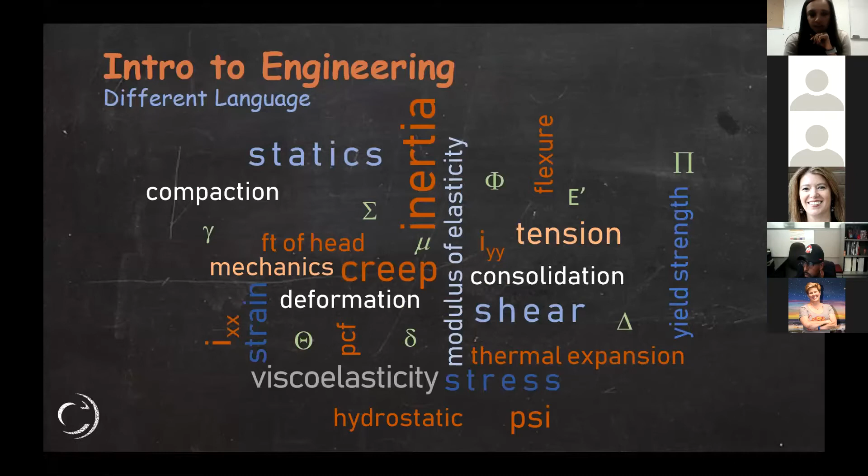All right, I believe we left off where he was talking about the Greek letters, is that correct? So we're on structures. Okay, all right, let's start with a look at the structural side.

The most basic form of structural design takes into account the behavior of rigid bodies. I say rigid bodies because as engineers and contractors, we typically deal with rigid bodies rather than flimsy or floppy bodies. If we can't estimate how a still body or a body in motion will move, then we can struggle to design a safe structure. Indeed, the less rigid a body is, the more difficult a design becomes.

When engineers begin their college coursework, ooh, Tryg, I see is entering the room. One of the first classes is a study of statics. Let's see, Beth, do we have Tryg back in? Hey, I'm back. Hey there. Well, sorry Tryg, Alexis already gave your whole presentation, so we're all now ready to go be engineers. But thank you for trying.

I'm really sorry about that, I haven't lost my internet connection in a year and it suddenly decided to go out just now. Well, we are thrilled that you're back, so we'll let you pick up right where you left off. Okay, where did I? Honestly, I was still going, I didn't know I lost you guys. I gave a brilliant presentation.

The last 10 slides, I think if you pull up the structures theme slide and go from there, that would be great. Okay, so behavior of rigid bodies. Yes.

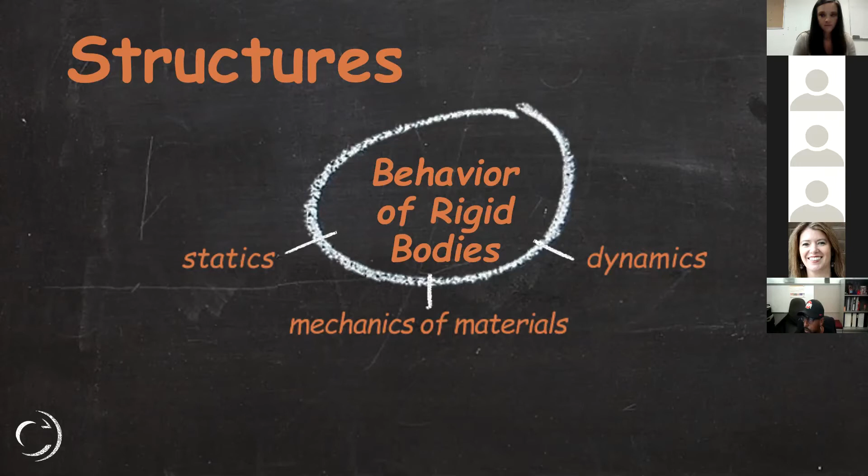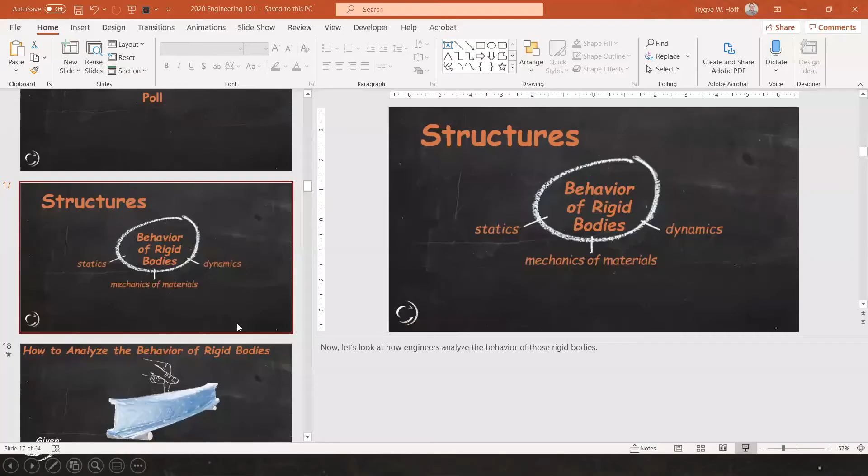And looks like PowerPoint thinks that I am in the wrong spot. There we go.

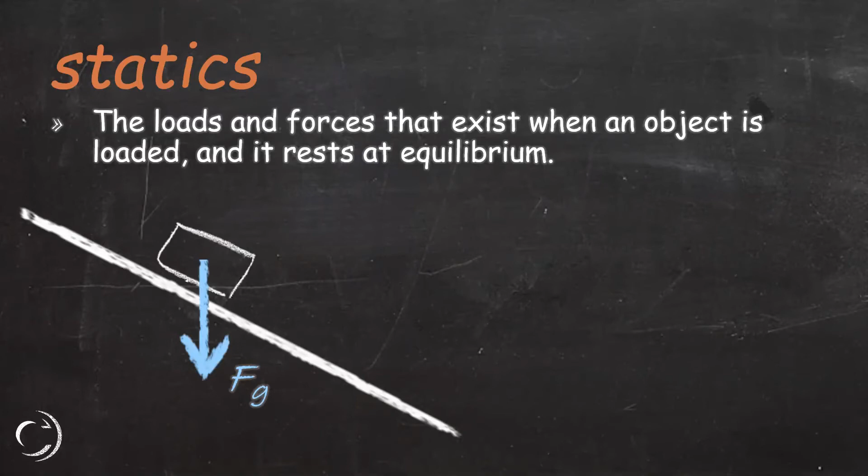Okay, so let's take a look at each of these. First, statics. Statics is the study of the loads and forces that exist when an object is loaded and at equilibrium, meaning it's not moving. So if we take a ramp and place a block of wood on it, we know it's going to experience gravity. The force of gravity is pulling it straight down, trying to pull that block of wood to the center of the earth. Now, Isaac Newton tells us there need to be equal and opposite reactions.

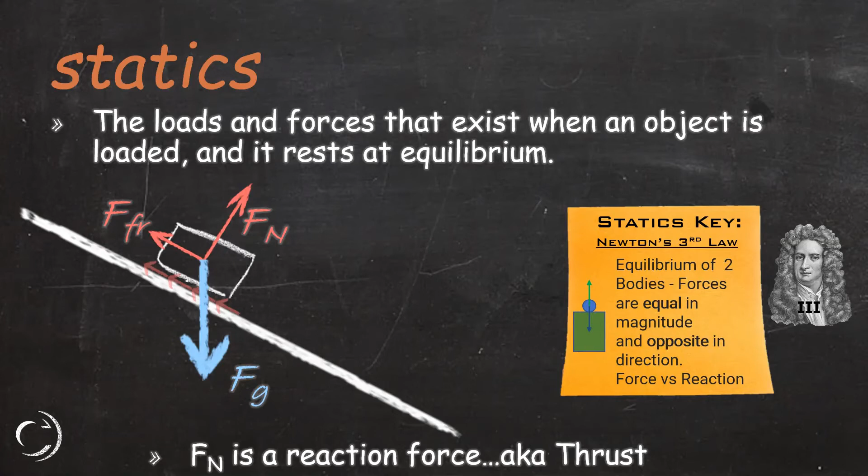So in other words, if the force of gravity is the only thing acting on that block of wood, the block would try to fall through the ramp. Obviously, something is keeping that from happening, and that's two different forces. One is the force of friction, which keeps the block from sliding down, since in statics we're looking at it not moving. And the normal force, which is just another way of saying the perpendicular force — that's what the ramp is doing to our block of wood. F sub n stands for the normal force, and that's a reaction force, reacting to gravity. That reaction force is just another way of saying thrust. So a lot of times you'll hear the term thrust thrown around — thrust is the reaction to a different force.

Now let's look at dynamics. Dynamics is when we add just enough load that the body starts to move. So we take our same block of wood on that same ramp. It's still experiencing gravity, still experiencing the pushback from the ramp, and still experiencing the friction that's keeping it from sliding. But now we add a new force — let's say we tap it with our finger and the block starts to slide. So the force from our push was just enough more than the force of friction to get the body to move. That's a study of the dynamics of that block.

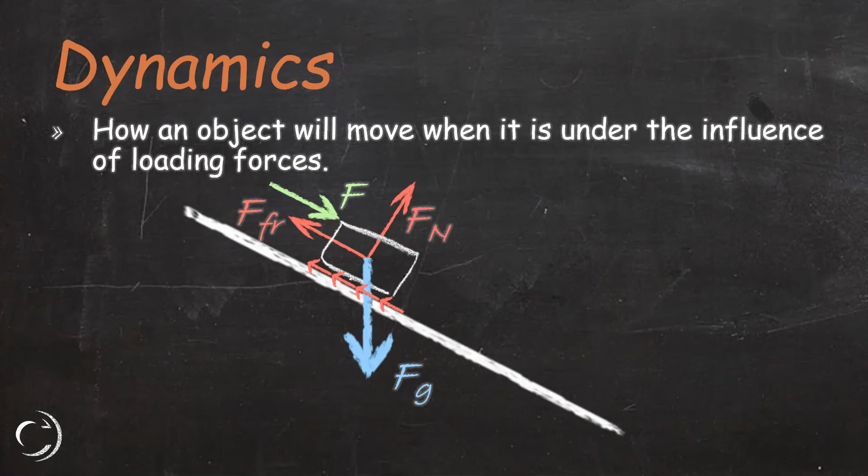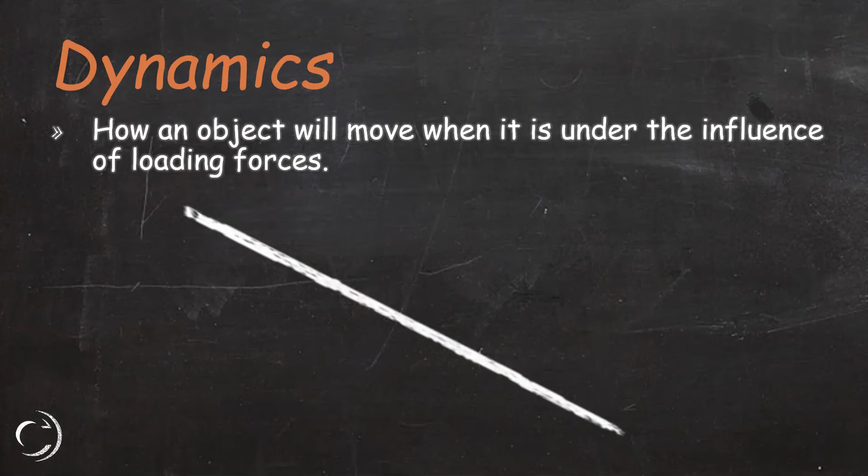Now, what would happen if that force of friction was really strong? Let's say it's on sandpaper on the ramp, and we apply enough force to move it. What's it going to want to do? Well, it may want to slide — there's a possibility, even with 60 grit or 40 grit sandpaper, it might still slide along the ramp. But it may not — it may grip so much that when we apply that force, the block starts to rotate and then rolls off the ramp. That's another aspect of dynamics we can study when looking at these different rigid bodies.

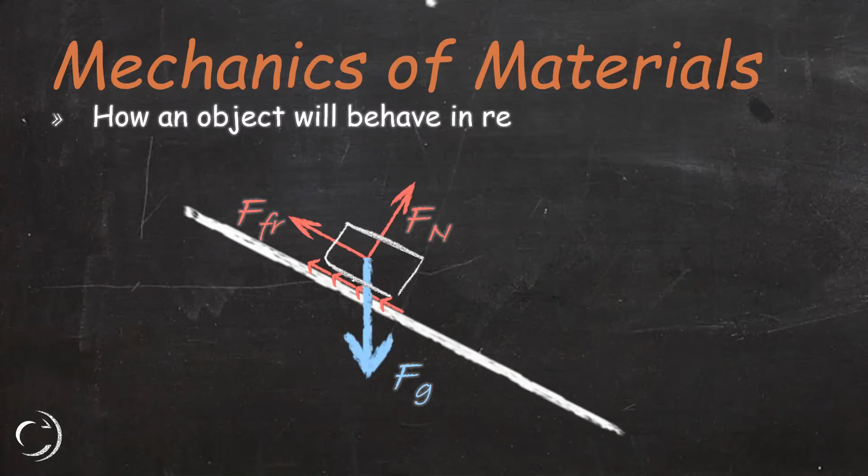So now let's jump to the next category, mechanics of materials. Mechanics of materials is a study of what happens, what that block of wood does, when we apply the load and it doesn't necessarily move. Well, the strength of the material might impact what happens to the block — maybe the block collapses if we have too much load on it.

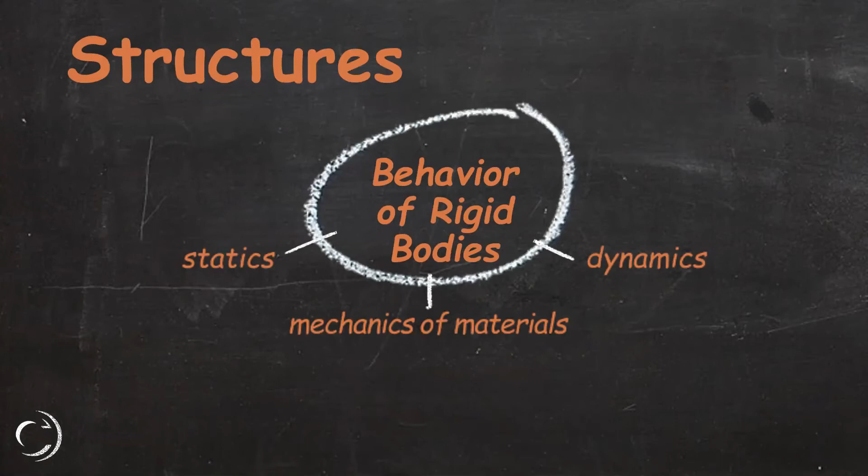So that's the behavior of rigid bodies. We're looking at statics, we're looking at dynamics, and we're looking at mechanics of the material, or the strength of material. Now, how do we analyze that behavior of rigid bodies?

So one of the givens is that all objects are going to deform under load. Now, when I press down on my desk, it doesn't visibly deform. But microscopically, if we're dialed in super close, there is a little bit of deformation there, and we could measure that. The mechanics of materials tells us how to determine how much it's going to deform.

So the material of this wooden desk is pretty strong, and you're not going to really see it deflect much. But if I were to push on some Jell-O, you would see it deflect quite a bit. So the difference in the strength of that material and the stiffness of that material all plays into how those objects deform under load.

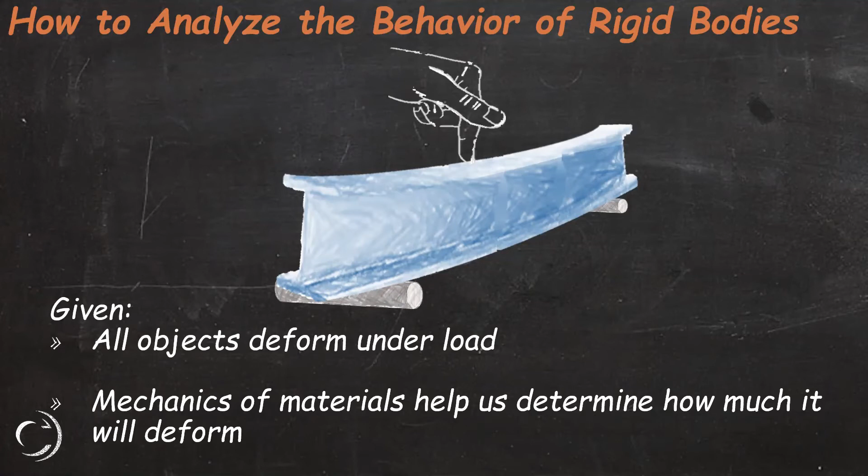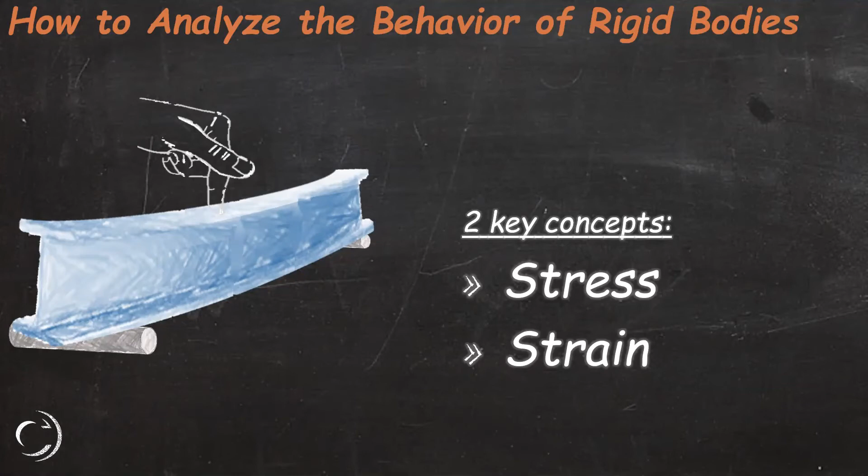So there are two key concepts here when we're looking at how rigid bodies behave, and those two concepts are stress and strain. You guys have all heard of stress and strain, both personally, certainly in the last 6 months, but also you've heard about it from a structural standpoint. I'm going to go out on a limb here and say that you have. So let's take a closer look at both of these.

Stress is the measure of the intensity of an internal load acting on the object. Sometimes it's difficult to remember which one of these is which. Remember, stress is what you feel day to day when you're at work and you are stressed, and it's just tearing you up inside. You're not showing any physical reaction to that stress outwardly. It's all internal. With strain, it's the other opposite end of the spectrum.

With strain, you're actually deforming. So when your arm breaks, you didn't stress your arm, you strained your arm. Now, certainly stress and strain work together, and we'll talk about how they work together. But the very basic concepts of stress and strain: stress is internal, we can't measure it but we can calculate it. Strain is external deformation, so we actually see that change.

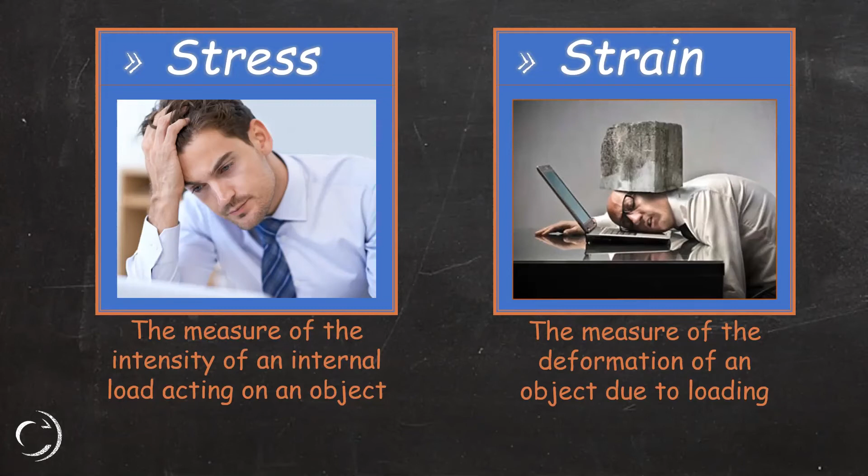So let's look at some different stresses. We're going to look at three basic categories of stresses: axial stress, bending stress, and shear stress. So let's look at axial stress real quick.

Axial stress means the forces that arise from internal loads that act along the longitudinal axis of a member. We're showing two different types of axial stress in this slide. One is tensile stress, so in tension. That rope that we're showing at the top is in tension, so that's pulling it along the longitudinal axis, lengthwise. The other is compressive stress, and we're showing that with the elephant sitting on the column at the bottom of the slide.

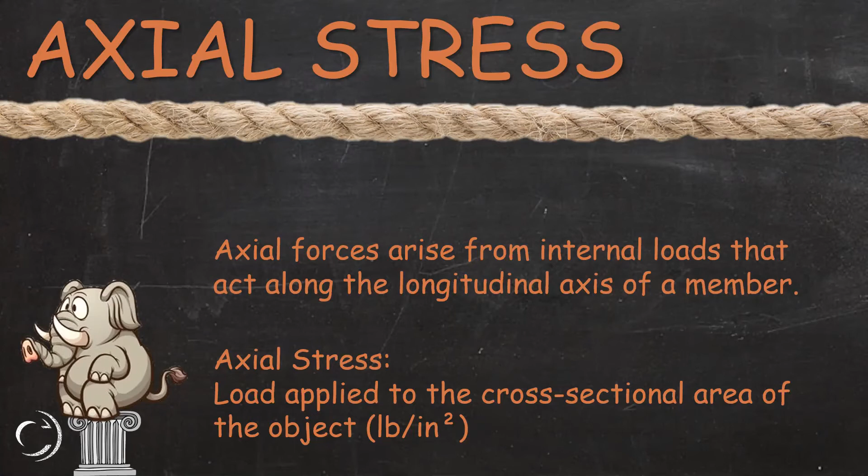Now, we calculate axial stress by taking the load that's being applied, so in this case, an elephant. How much does the elephant weigh, and what's the cross-sectional area of that column? If we were to slice that column horizontally, we could measure what its cross-sectional area is, and then we would take the weight of the elephant divided by that cross-sectional area, and that gives us the axial stress in that column. Here's the equation for that.

Let's take an example, just a really easy example, some very simple math. If we had a 1 inch by 1 inch concrete bar, it doesn't really matter how long it is, but let's say it's 1 inch tall, 1 inch wide, and 10 inches long. The cross-sectional area, if we slice that bar down the middle, is going to be 1 inch times 1 inch, which is 1 square inch. So the area of this bar is 1 square inch. If this bar was 10 inches long or 100 inches long, that doesn't matter. We're just looking at the axial stress on this bar, which is the cross-sectional area. It doesn't take into account the length.

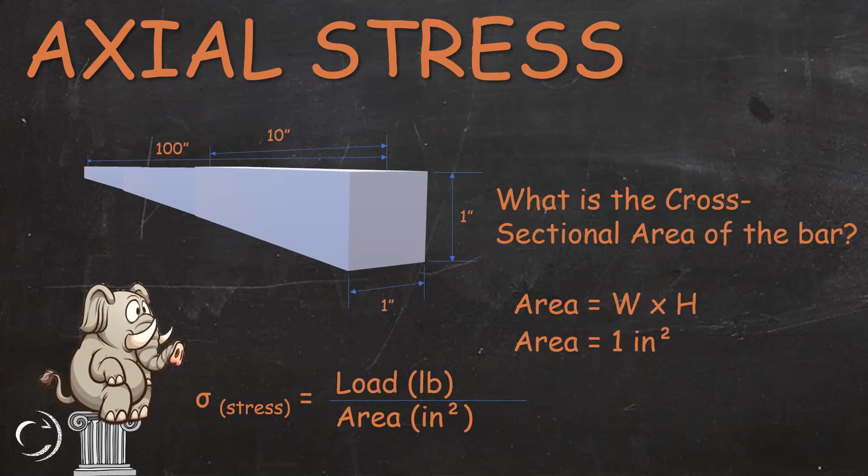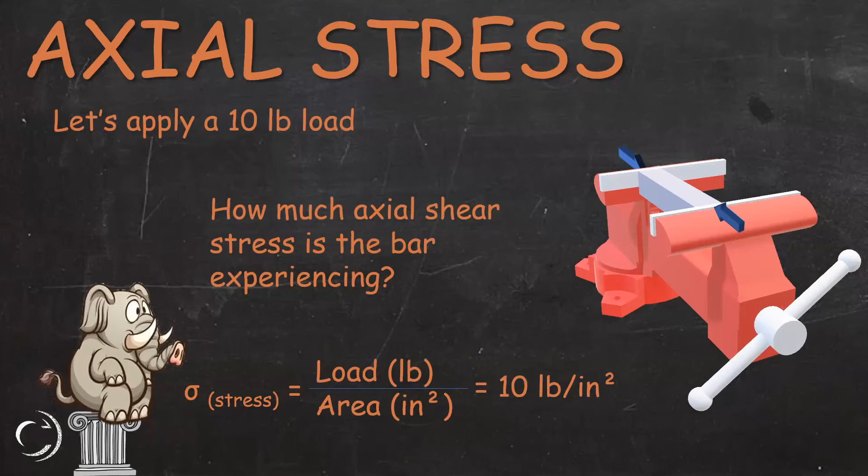So if we took that concrete bar, we put it in a vise and we spin the dial, and we apply a 10-pound load, how much axial stress is the bar experiencing? The load is 10 pounds. We know the cross-sectional area we just calculated is 1 square inch. So it's 10 pounds per square inch, that's our PSI, pounds per square inch. You can denote that PSI or pounds per square inch, both are kind of interchangeable terms.

So we mentioned the differences between tension and compression. Tension is where that rope is holding a load. Compression is where we have a column that's supporting a load. Now let's look at bending stress.

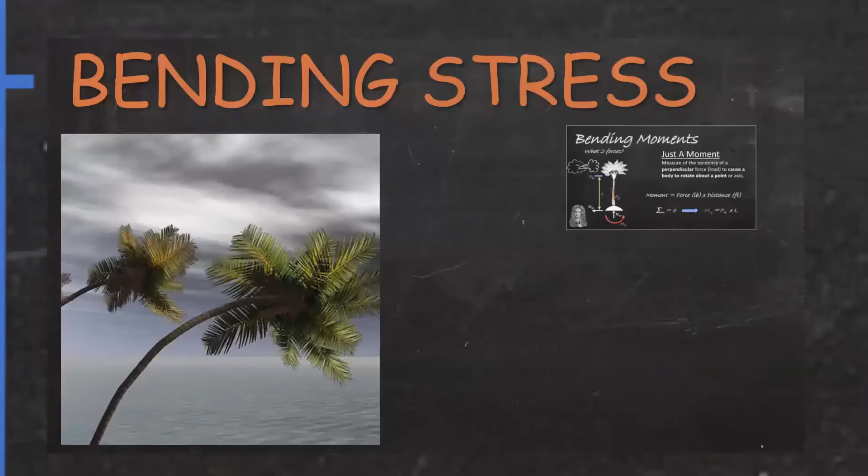Bending stress is an interesting one that's a little bit different. Bending, also known as flexure stresses, develop in an object when there's internal bending moments, and they're caused by a perpendicular load to a longitudinal axis. So looking at those palm trees, let's assume that they're bent over because of a windstorm, rather than that's just the way they're growing. Let's look at what the bending moments, those internal bending moments, are.

A bending moment is the measure of perpendicular force causing a body to rotate about a point or an axis. In this case, with our palm tree, we're applying a wind load at the top of the tree. What are the two forces acting on this tree? We already talked about it with the block of wood earlier. Obviously, we've got the wind load, but we also have the force of gravity pulling that tree down, trying to pull that tree right through the ground. But Isaac Newton tells us no, something has to keep that tree in place where we can see it. So that is the resultant force pushing back up from the beach.

But the tree's not sliding across the screen, is it? So something must be holding it in place, so there's a resultant force pushing back in the opposite direction. If you look at the force of the wind, pressure of the wind PW, and the resultant of the wind down at the root ball, they're pushing in opposite directions.

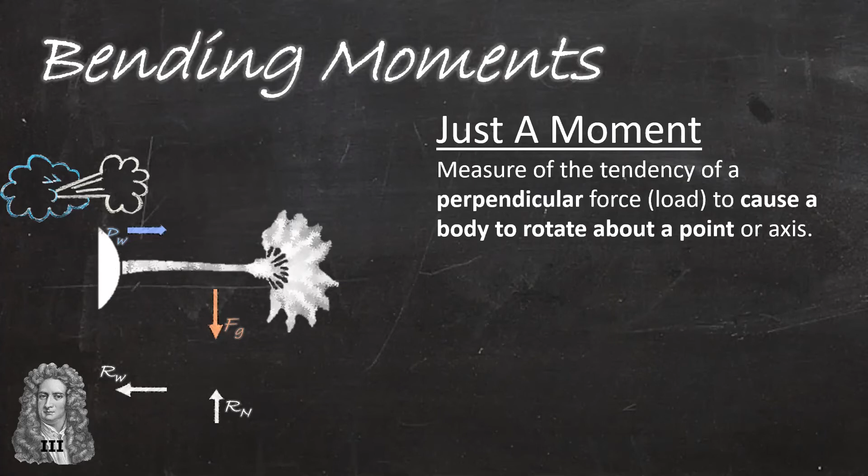If you think about it, that tree is really wanting to twist because it's got something pushing it to the right at the top and something else pushing it to the left at the bottom. It wants to twist. Something keeps it from twisting, and that is the moment created by the root ball of this specific tree.

So the moment at the ground, M sub G, is what we would call that. Moment is a measurement of force times distance. So in this case, there's a moment at the base of that tree that's resisting the wind pressure. That's our force, PW, times the height of the tree as our distance, so let's call that L.

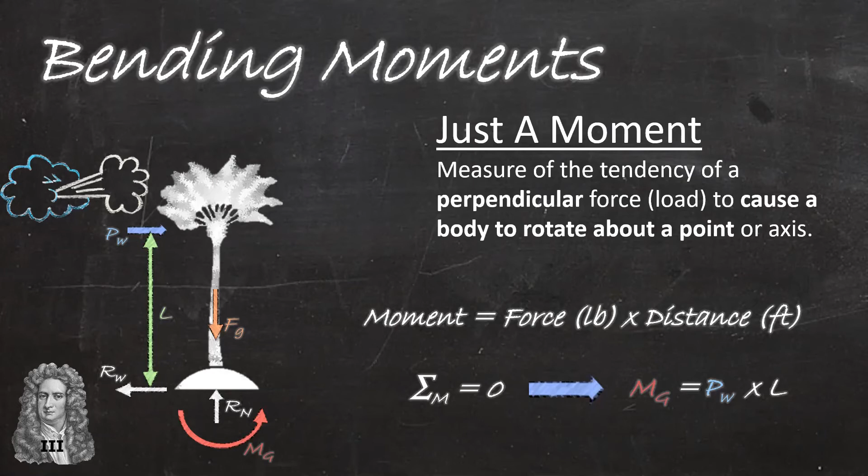We do what we call a sum of moments. Isaac tells us everything has to be equal and opposite, so the sum of all these different forces has to equal zero. We can calculate that moment in the root ball by summing everything to zero and then doing the calculation. We're not going to get into those calculations right now, but that gives you an idea of what these bending moments are.

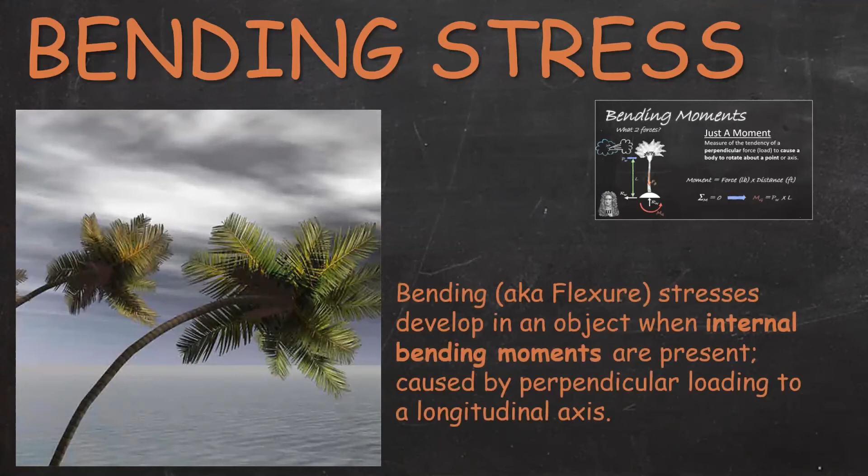So let's look at the bending involved in a concrete beam. The equation for bending is the moment at the bending axis, and we'll talk about the bending axis in a second, multiplied times the perpendicular distance. Remember, the perpendicular distance on that palm tree was the height of the palm tree. And then we divide by the moment of inertia.

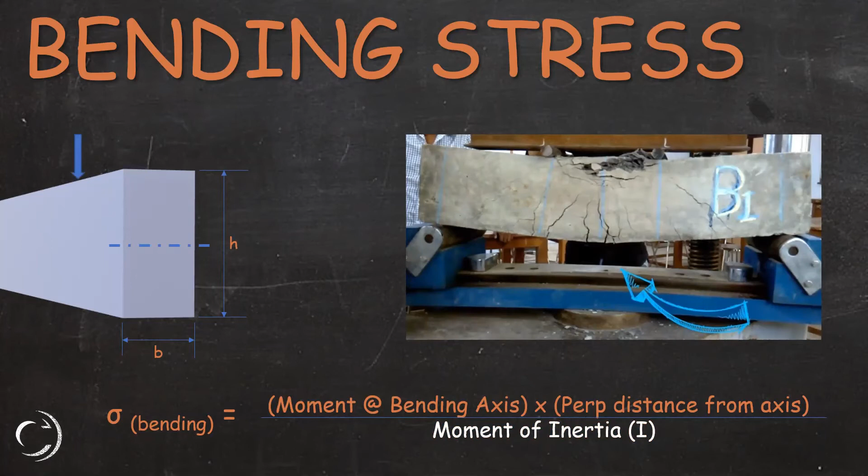So this is our bending axis. We apply a load from above, and that beam is trying to bend around that dotted line. Let's talk about the moment of inertia that's in the bottom of the equation. The moment of inertia is just a measurement of how well a body resists bending and deflection.

Take, for example, if you were to break your arm, the strain that it experiences. If you're applying a load to your upper arm and it wants to break, the resistance to bending that the bones are creating is the moment of inertia of your arm. Now, if we're just looking at a rectangular beam, that's a pretty straightforward calculation: it's 1/12 times the width of the beam times the height of the beam cubed.

If you're looking at this equation, you'll notice there's one b in the equation, but there are three h's—that's what we mean by cubed, so there's h times h times h. If that load is being applied from above, the height of the beam is way more important than the width, because I stands for the resistance to bending. The more h's we have, so if it's a tall beam, the more it can resist the bending. So if you were to flip that beam on its side, it would not be as strong because now its height is much shorter.

So think about your floor joists in your house. You'll notice, if you've ever watched construction of your house, floor joists are oriented this way with a lot of height, not very much width.

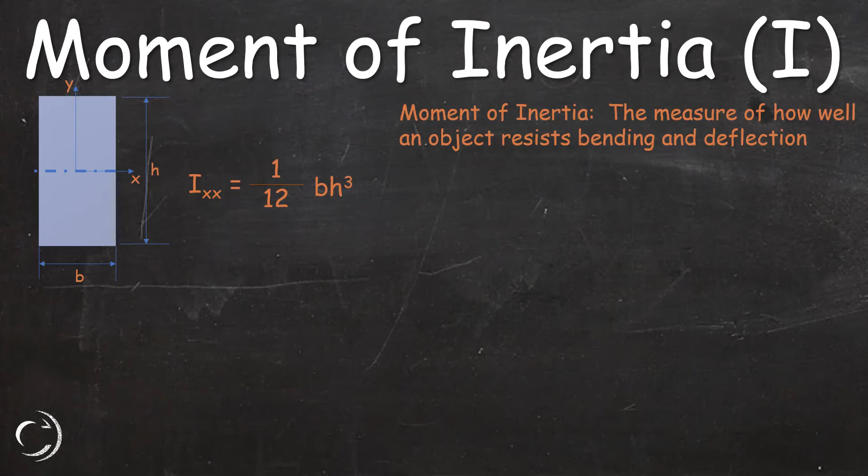Now, if we were to get into a more complicated shape, like a triangle, you can see that the moment of inertia gets crazy. I'm not even going to get into that, but those are the calculations for the bending of a triangle. And then, as I mentioned, I'm in the pipe industry.

So when you're looking at a corrugated pipe, corrugated plastic pipe actually gets its strength from the corrugations. Those corrugations are trying to resist bending, and to calculate that, you have to know what the moment of inertia of that corrugation is. If you look really closely at one of those corrugations—let's see if I can highlight it here with my mouse—calculating that is going to be really complicated if you think about how difficult it was just to do a triangle.

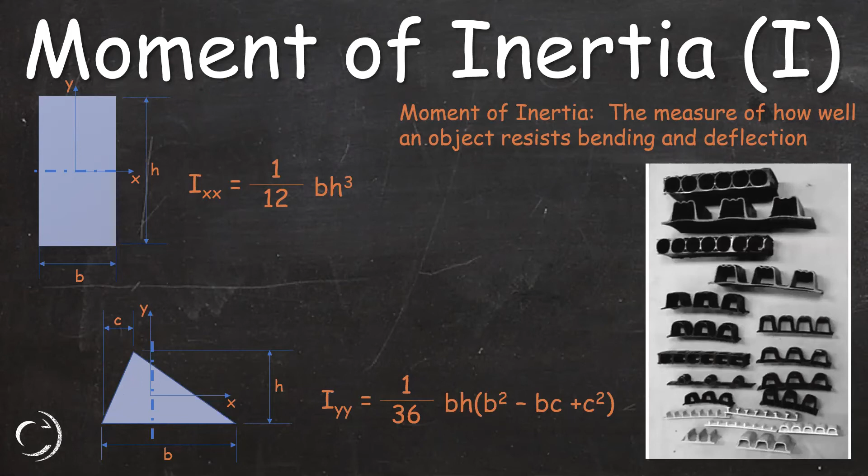So there's a lot of math that goes into this. Typically, your pipe producer is going to give you that information rather than requiring an engineer to calculate it.

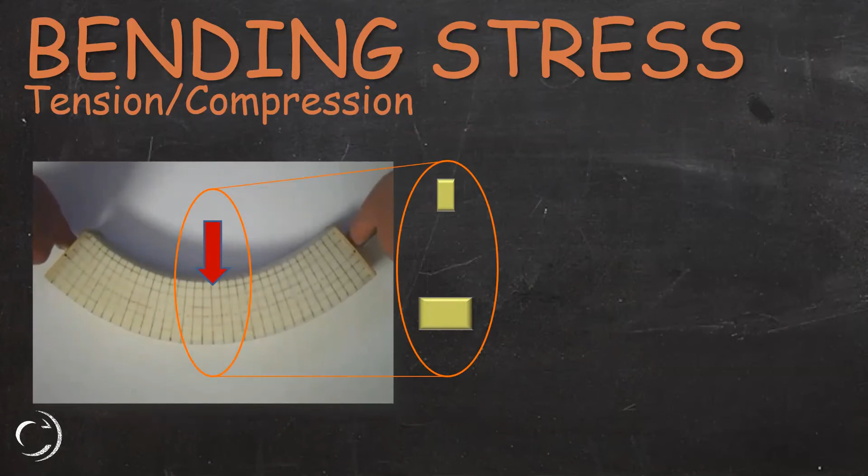Now, bending also has tension and compression, just like the axial loading did. So if we take this beam and apply a load from above, and the beam starts to bend, part of the beam is going to go into compression and part of the beam is going to go into tension. You can see on our little blocks to the right that the blocks on the top are getting squished together and the blocks on the bottom are getting pulled apart, and that's compression forces and tension forces.

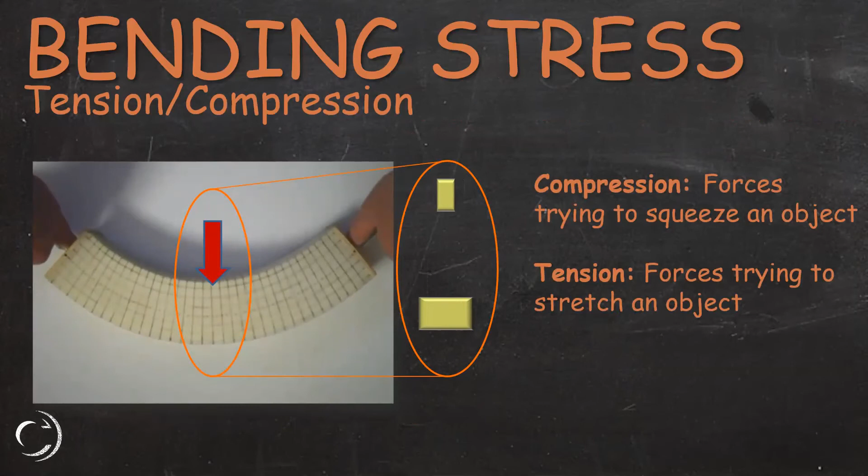So compression, we're trying to squeeze those particles together. Tension, we're trying to pull or stretch them apart.

Take it back to that concrete beam concept. If we have a concrete beam and apply a load right in the middle, just like we did with that foam beam on the previous slide, where would you expect the compression and tension zones to be? You push down on that beam and picture it in your head. That beam wants to bend down in the middle, which means the particles at the bottom are trying to stretch out, while particles at the top near the load are trying to push together. So our compression zone is at the top where they're pushing together, and our tension zone is at the bottom where they're trying to pull apart.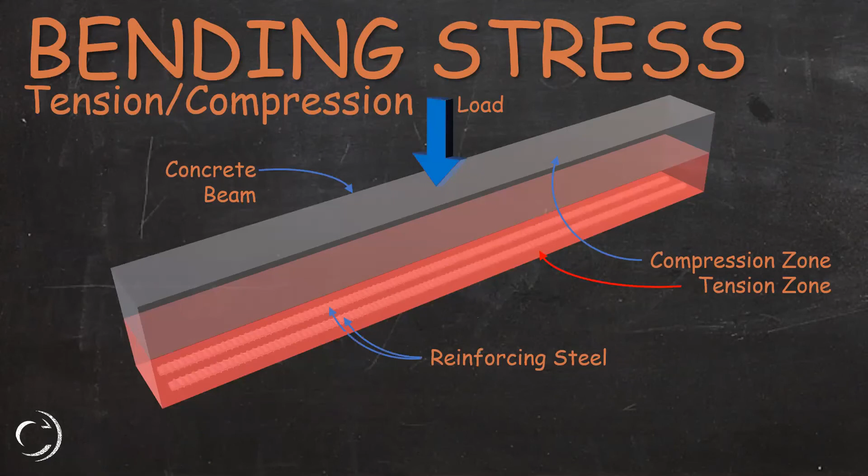Where would we want to put reinforcing steel? One thing we haven't talked about yet is the strength of materials for concrete. Concrete is really strong in compression, but it's not nearly as strong in tension. So we help it out by adding reinforcing steel to the tension zone, which is red in this example. That's where our reinforcing steel should go.

If we were to look at that beam with a finite element analysis, basically a fancy way of saying we model it with a computer, you'd see your compression zone in blue and your tension zone in red. You can see a couple sticks of reinforcing steel inside that beam. As the load is applied, the concrete experiences some stress and then some strain. The dotted line is the stress in that concrete, and then it drops off. You can see when it gets to 2 seconds.

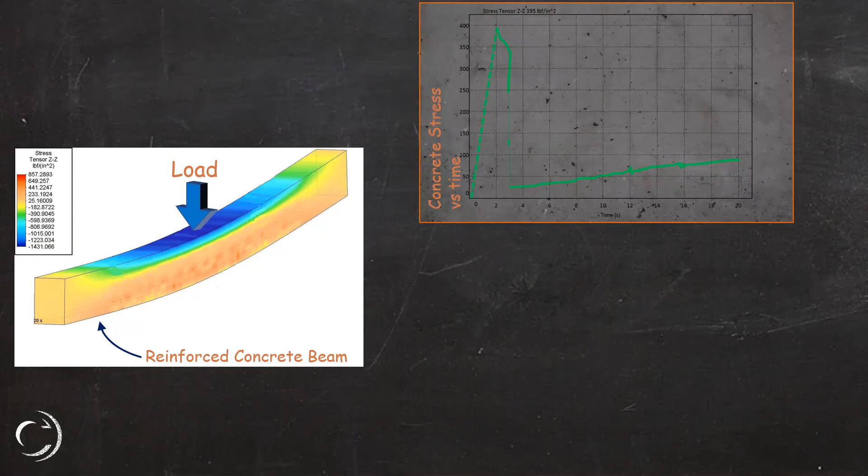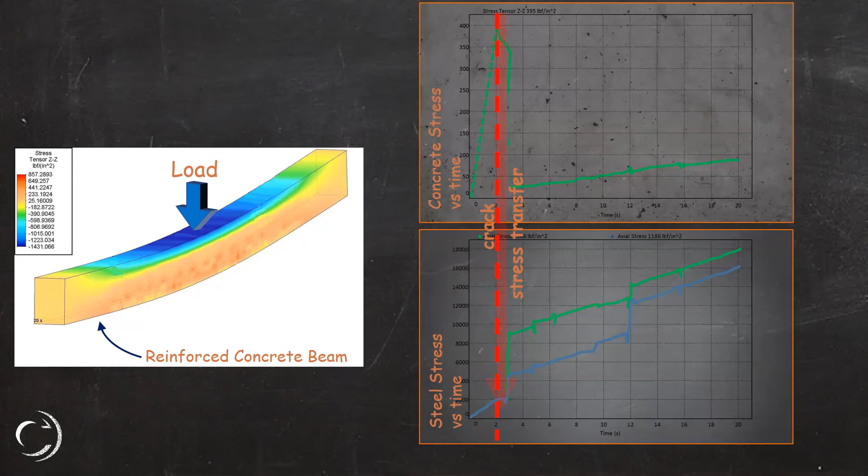Now let's look at what happens to that reinforcing steel. At the exact same spot, at 2 seconds, the reinforcing steel is just kind of going up, and then suddenly it's engaged. What's happening is the concrete is cracking, and if there's a crack, it means the concrete is moving, so the steel has to be picking up load. That's why we see that steel jump up on the chart. So the crack is simply a stress transfer—it transfers the stress to the steel, and then the steel engages and carries the load.

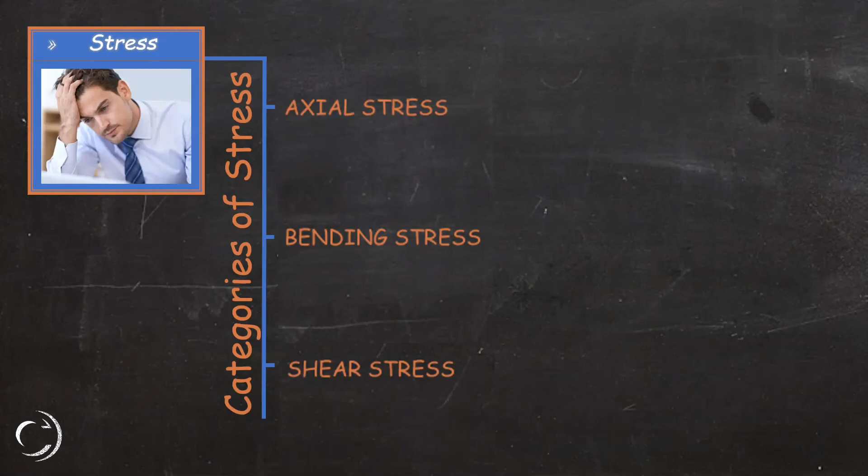That was a little deeper than we needed to get on bending, but I like to point that out. So let's talk about shear very briefly. We're all familiar with the concept of shear but maybe don't realize it. Shear is really the concept of scissors. Even in grade school, we understood that we could take a set of scissors, squeeze the handle, put the blades to a piece of paper, and it would cut it. That is technically shearing the piece of paper.

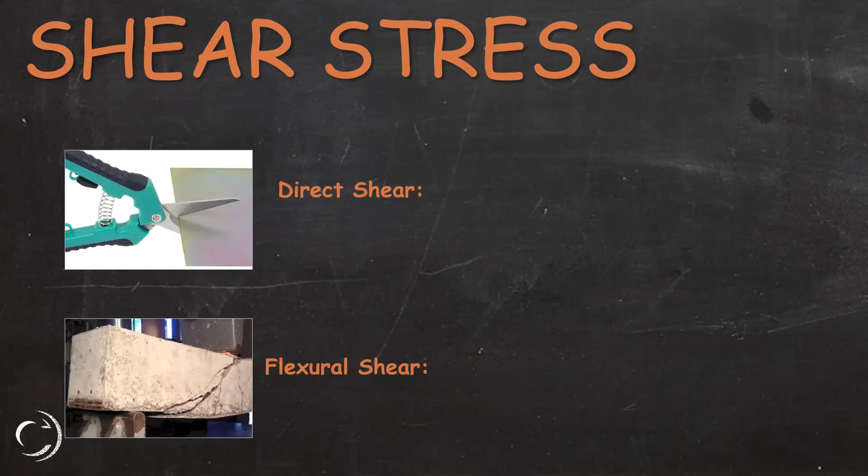That's known as direct shear, where we have a load almost directly opposite on either side. Flexural shear is when we have that load applied over a larger distance. Let's look at each of those. With direct shear, let's put our concrete beam here and apply direct shear, just like scissors. I've spread the point loads out a little bit, but just imagine they're right next to each other in terms of closeness.

Now, as they're pressing up and pressing down, if we took an imaginary cube out of that concrete beam, we could call that unit shear stress. Notice how we have the blue arrow pointing up and the red arrow pointing down—that cube, that unit shear, is trying to rotate. But remember, Newton told us there has to be equal and opposite reactions. So the only thing keeping that little piece of concrete from rotating are forces pushing in equal and opposite directions from those two loads applied to the beam.

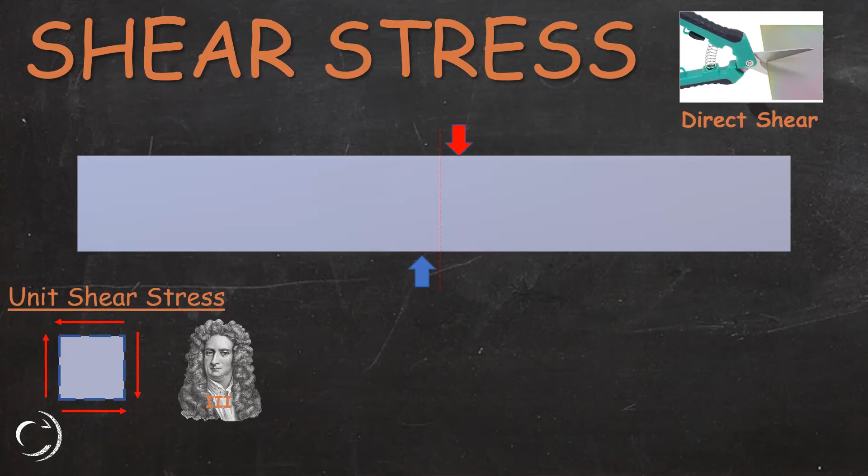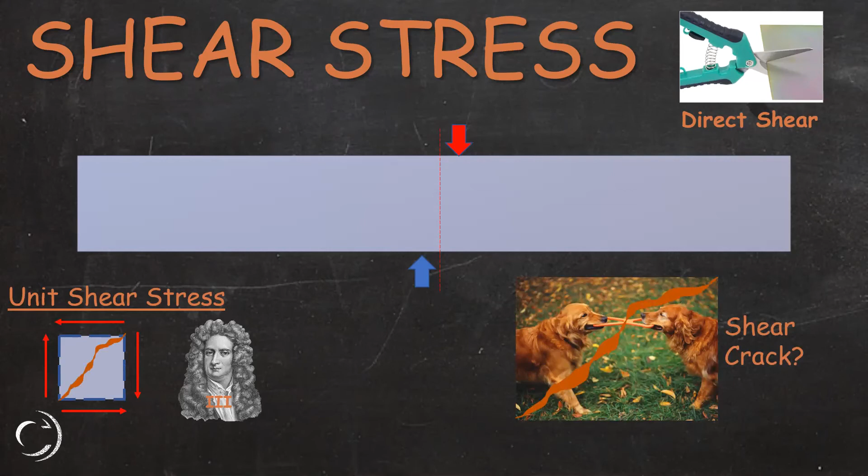Now, what does that look like? It kind of looks, to me anyway, like a couple of dogs pulling on the same toy, a little tug of war, because you've got two arrows pulling to the top left and two arrows pulling to the bottom right. What's going to happen if that was a piece of paper and we did that? It's going to rip diagonally, pulling directly down the middle between where those two forces are pulling. That is an example of direct shear.

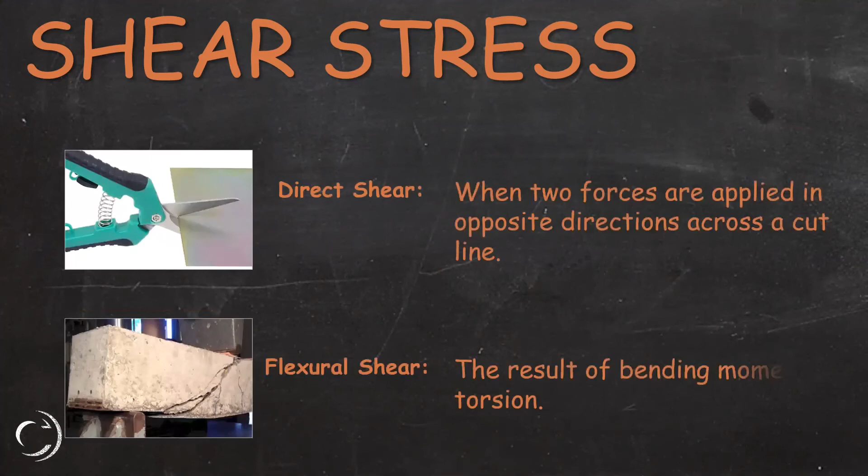Flexural shear is if we apply those loads much farther apart. Remember, the first time we had those loads right next to each other like scissors. Now it's more like we're looking at a bridge beam or a floor joist. We have supports at both ends of our joist, and we're applying a load right in the middle.

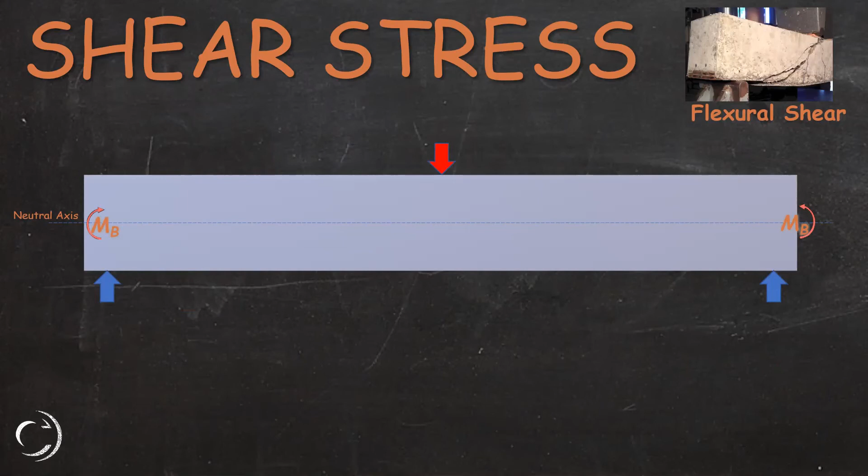That floor joist wants to rotate, like we talked about with the palm tree. To resist that, it has moments throughout. There's a tension zone, like we mentioned with the concrete beam. It's trying to be pulled apart at the bottom, and pushed together at the top. That's our compression zone. The tension zone of all materials will start to crack as they exceed their tensile strength, so we're showing our cracks here on the joist.

And the shear zone happens at the ends, that's where our supports are. So just like with our scissors, we had the support and the little unit shear. Same thing is true on this bigger beam that's spread out. We have shear zones at both ends of the joist.

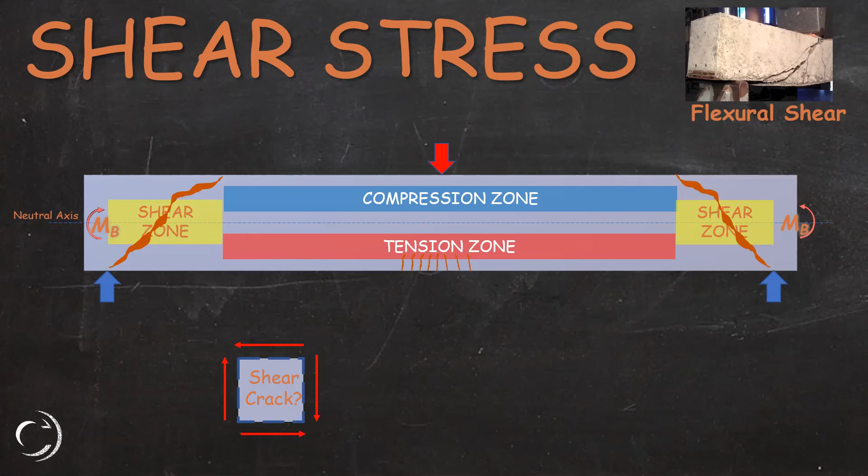For example, if you were drilling a hole into a beam or into a floor joist, to run your plumbing or your electric through that floor joist, you've got to be careful where you drill it. You don't want to put it in the tension zone, and you don't want to put it through the shear zone. So there are some limitations as to where you're allowed to put holes in your floor joist, because of the way the behavior of this rigid body works.

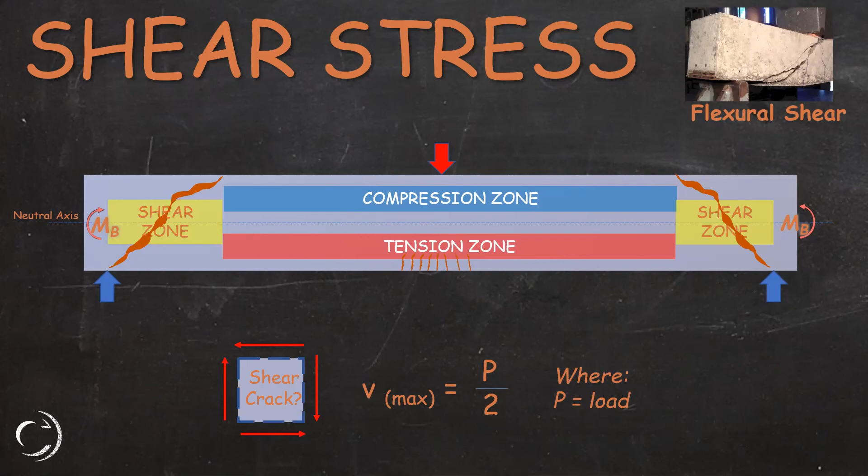If you wanted to calculate your shear stress, it is the load being applied by that big red arrow at the top divided by 2, because we've got 2 supports here. So it's P over 2.

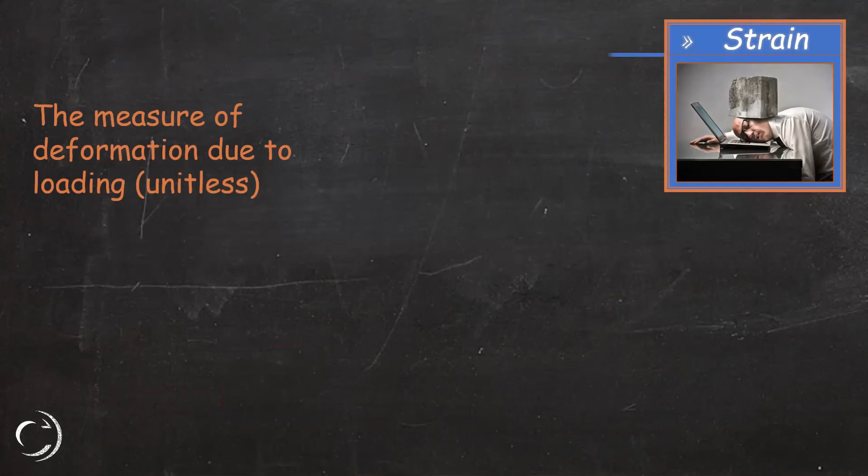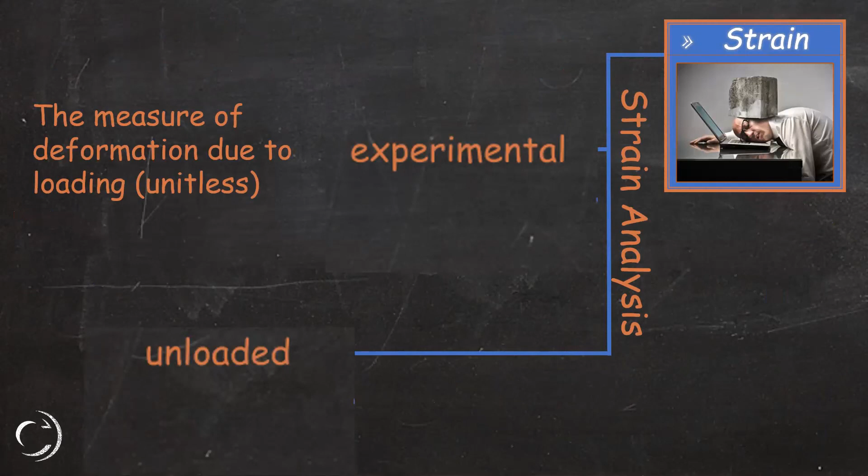Okay, let's look at strain really quickly. Strain is the deformation, meaning if that block of concrete falls on your head, you're going to have some deformation in your skull. Different from stress, which is internal, strain is external. Strain analysis is really helpful to us from an experimental standpoint, because we can measure that deformation. And strain analysis is also interesting from how bodies can be strained without applying any load. We'll talk about that in a second, but first let's get to the experimental analysis.

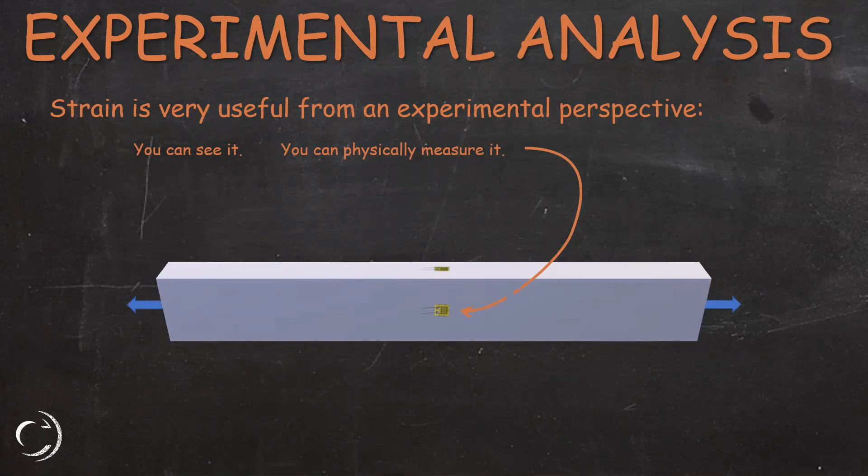As we apply that load, we can apply little strain gauges to that beam, apply our load, either pulling it apart or applying a load from above and trying to bend it. Those strain gauges will measure how much the object bends, how much it moves, how much it stretches, and they can tell us an experimental value, which is pretty nice. With strain, it doesn't really have a unit.

For example, if we take that same block that we were applying compressive stress to, if that block were to deform—with concrete it's more likely to crack, but let's say it's steel and it compresses rather than cracking. If that block is 4 inches long and we were to get it to squeeze down 1/10 of an inch shorter, that would tell us how much strain it has. It would be the change in length divided by length. You'll notice our units are the same top and bottom, they just cancel out, so strain actually does not have a unit. We usually say inches per inch, feet per foot, meter per meter, just so we're aware of what units we're dealing with, but in general it does not have a unit. So in this calculation, 1/10 of an inch divided by 4 inches equals 0.025 inches per inch. That's the strain this little steel bar experiences when we shrink it by 1/10 of an inch.

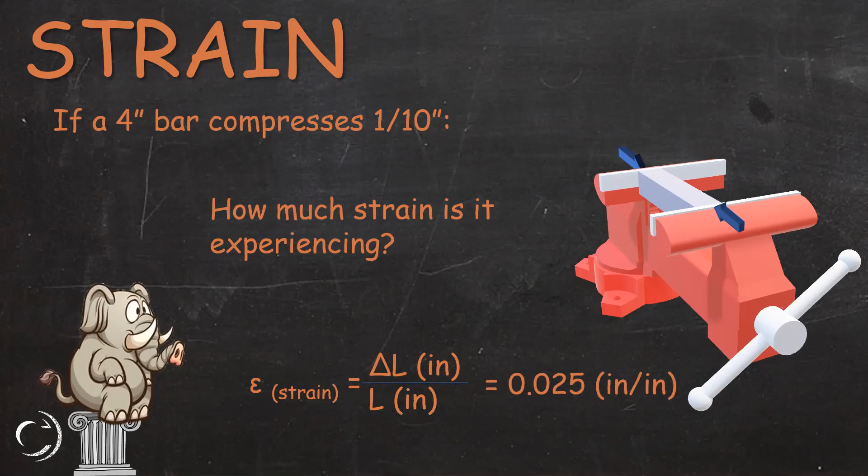So how might a heavy steel rail experience strain if we're talking change in dimension without any external loading? Is it from gravity? Is it from acid? Is it temperature? Or are you maybe not sure, but pretty sure they did it on Star Trek?

Okay, so we have some Star Trek fans, that's good. Temperature seems to be leading the pack right now, although gravity's a close second, and then acid is right after that. All right, so we're just above 50%. If we get some more folks giving their opinion on this, we'll give it another 15 seconds.

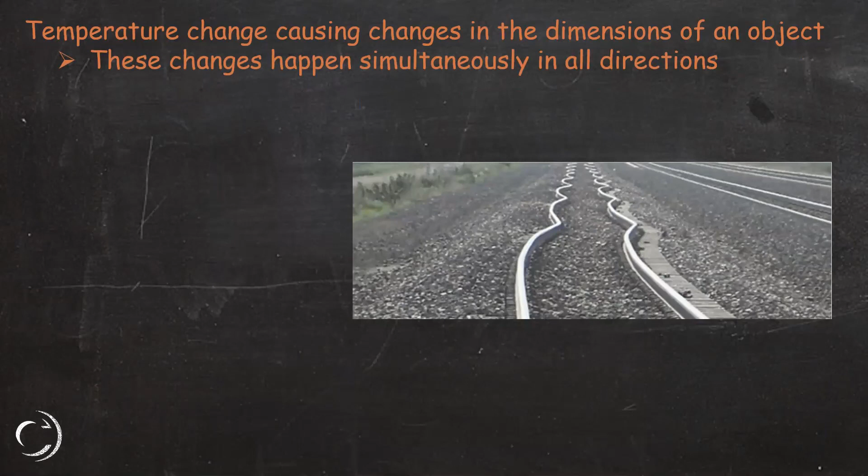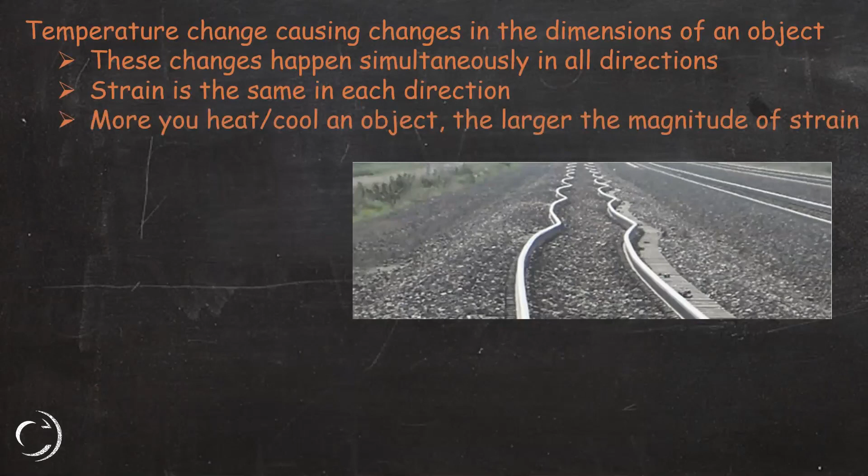One of the interesting things about thermal strain is it happens simultaneously in all directions. So those rails aren't just extending in length, they're getting fatter, they're getting taller - it's just they're really long rails, so when they increase a percentage in length, you see that more than the other two directions. The amount of strain is the same in all directions, and the more you heat or cool the object, the larger the magnitude of strain.

This is the equation for thermal strain. Alpha is the Greek letter we're showing there, it looks like an A. That's the coefficient of thermal expansion, and we're multiplying that times the change in temperature.

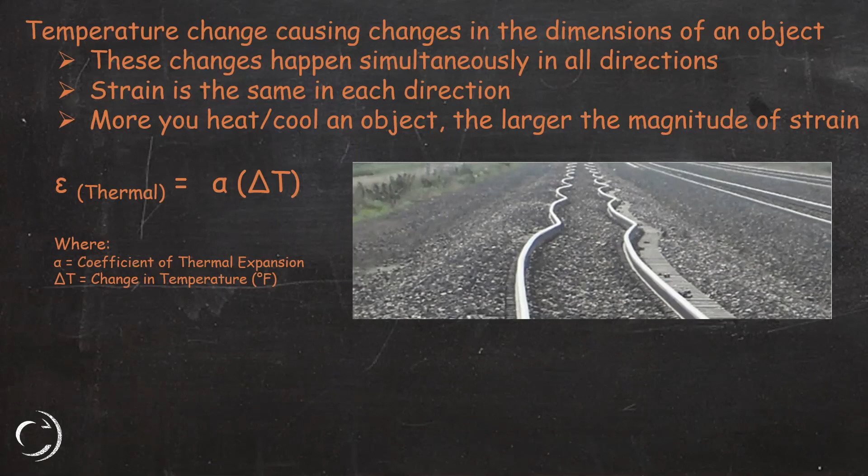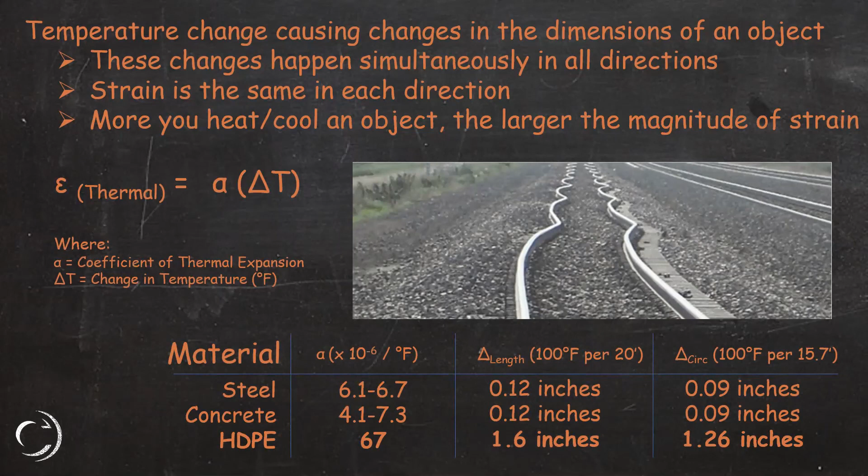I'll give you an example from the pipe industry. The coefficient of thermal expansion for steel and concrete are both in the 6 range - 6 times 10 to the negative 6 per degree Fahrenheit. That sounds crazy, so let's just focus on the fact that it's 6. Then plastic, HDPE, is around 67, so it's about 10 times as much.

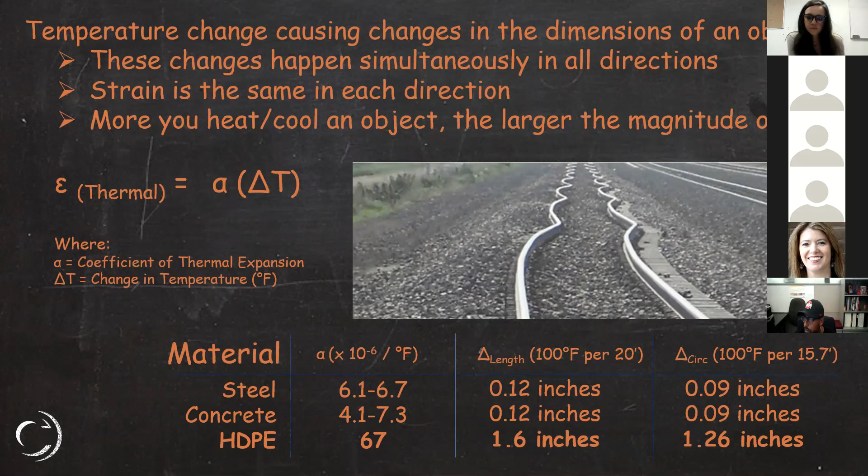What that tells us is if we were to have a 100-degree swing - let's say you had reinforced concrete that was 100 degrees cooler, it would shrink by about 1/10 of an inch over 20 feet. If you had a piece of black plastic that cooled 100 degrees, it would shrink 1.6 inches over 20 feet. So from the strength of materials concept and the design of different products or materials, we need to take that all into account from a design standpoint.

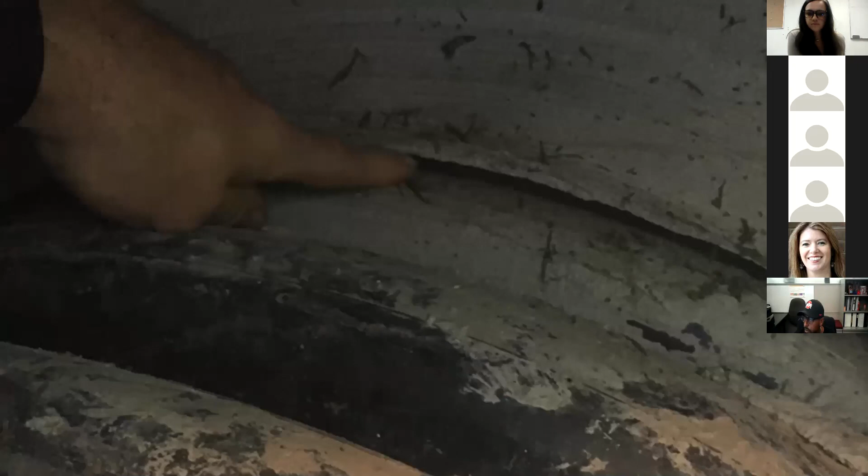Here's an example where a piece of black plastic pipe is going into a manhole, and you can see about a 1/2 inch gap there due to the change in temperature.